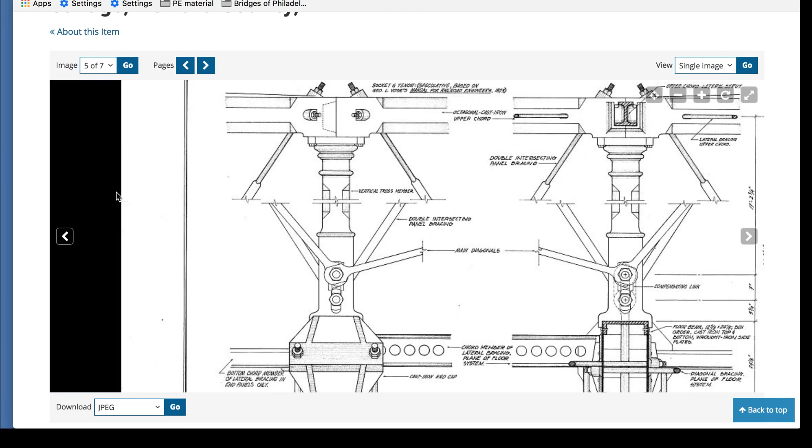So now, there are only 7 images, and this is a National Historical Bridge, and it's the only one existing in the world, an iron steel bridge, suspension bridge. So it's a pretty unique structure to look at.

And now they use cables instead of iron, and of course the cables elongate. This is a 150-year-old bridge standing with no issues. Now they replace cables all the time, as we know.

But this sort of reminds me of the bridge in Philadelphia with the pin design, etc. And this bridge came before the bridge in Philadelphia. This is 1869. Our bridge in Philly is 1895, I believe.

Let me bounce over one more. Yeah, 1869. And again, this guy was self-taught. He was born, I think, 1814. He was like 54 years old when this bridge was built.

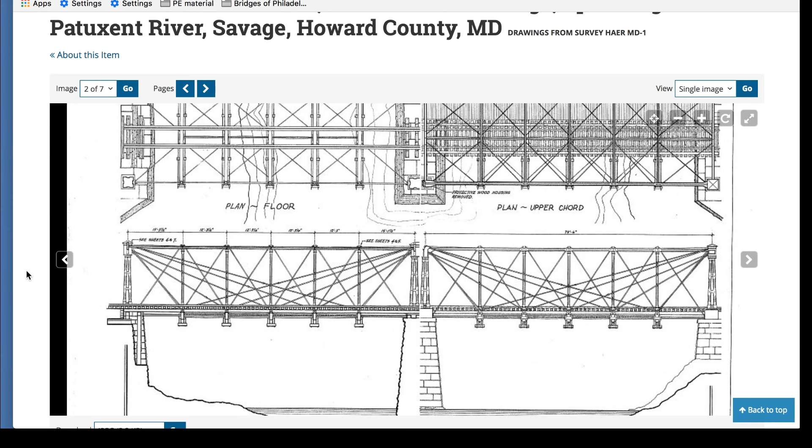And he was a carpenter. I'm saying, how awesome is that? And his bridge, they built over 100 of these because it was awesome.

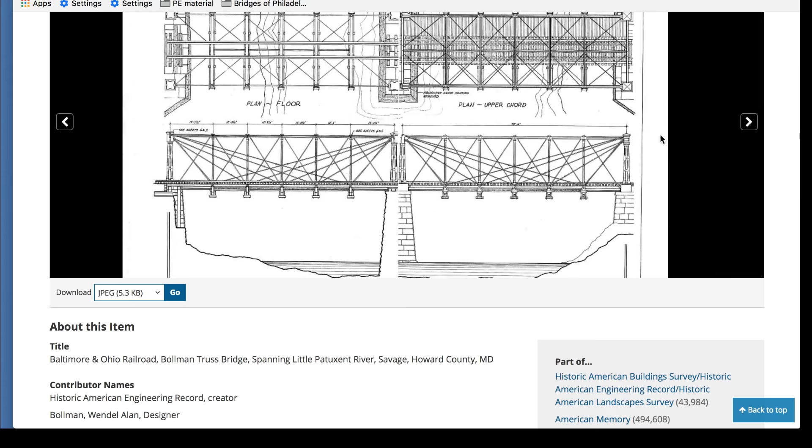Now, looking at this design, this is the bridge span, and they use the... let me see if I can get this out. Come this way, scroll. I'm going to show you the bottom of the page.

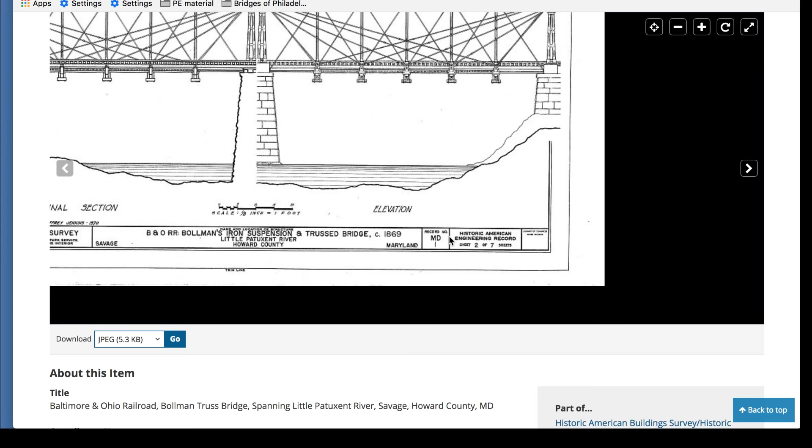Historical engineering record. This is, you know, they used a real survey of this, which is kind of cool to actually have online. This is the Library of Congress that has it. They only have 7 pages.

So it's up to you to figure out load paths. No engineer usually would like to try to take this on, because if you're wrong, it's forever in the record that you screwed up. So when I say it, I'm just theorizing load paths, but it's a truss bridge.

Don't, if you look at this one or whichever one helps your eyes, but kind of like looking at this one, they're two separate bridges. But look how this load is transferred to this column, and then all of these, 1, 2, 3, 5 of them, then it's transferred to this column.

Now don't leave out these members here coming down, here and here, all of it helping to level this deck and transfer the loads down these 2 columns, which they refer to, looking at my notes, as vertical post.

So here are the vertical posts, and as we see, if you got rid of the top chord, this load would want this top vertical column to fall inwards, 79 feet 6 inches it appears. But this top chord then becomes in compression, so it keeps the distance of these 2 apart. And yet, look at the scale of it.

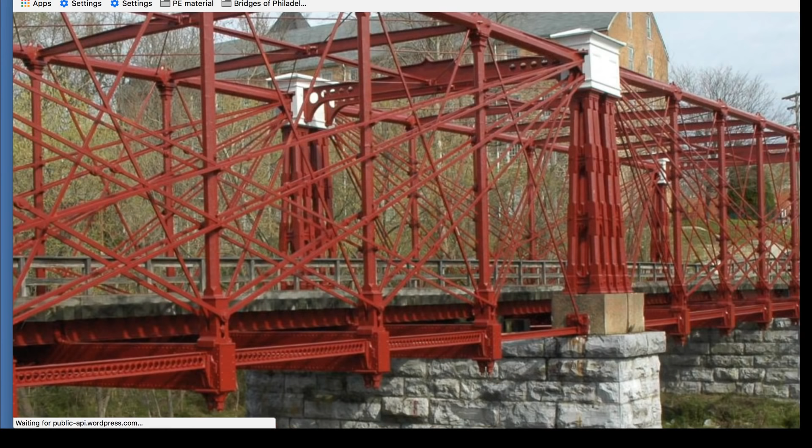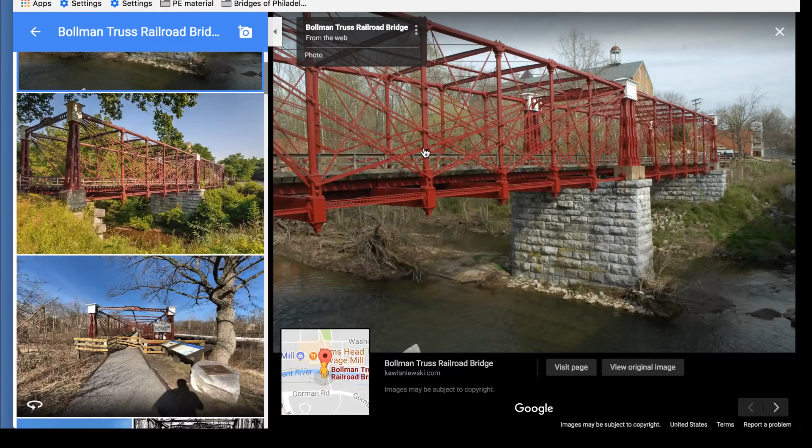Give me a second, okay here we go. So looking at, I did it again. When I touched on the image, it bounced over one. Huh. Oh, I got it. It's magnified, and so when I touch on it, it gets some other signal, I guess. All right, great, awesome, I don't really mean awesome.

So here it is here. And if we zoom in, if it allows me to zoom in now, here we go.

So these guys across are keeping them from coming, they're the struts, keeping these 2 from folding in, obviously. And now we've got this little small scale of this.

Beautiful, and here's your supporting column, which they call the verticals, and those are your end verticals. Looking at my notes here, make sure I get everything right. Yep, they still call this a portal strut, so it's an end portal strut, and these are your regular struts.

Awesome, and then here are these members here. Now here it is hanging here. Take note of, let's see if I can pull that down. Yeah good, take note of the last one. Look how small the scale is.

Isn't it amazing? And they offset it, it's lowered a little bit. No big deal, I mean obviously it lasts 150 years. Remember, this guy taught himself, so no one taught him this. He taught himself, and it's so solid that he got a patent on it.

They did 100 bridges, and people were following his design around the world until they went to cables, etc., and changed over. But it's very simple and prefab, mixing metals, cast iron and wrought iron.

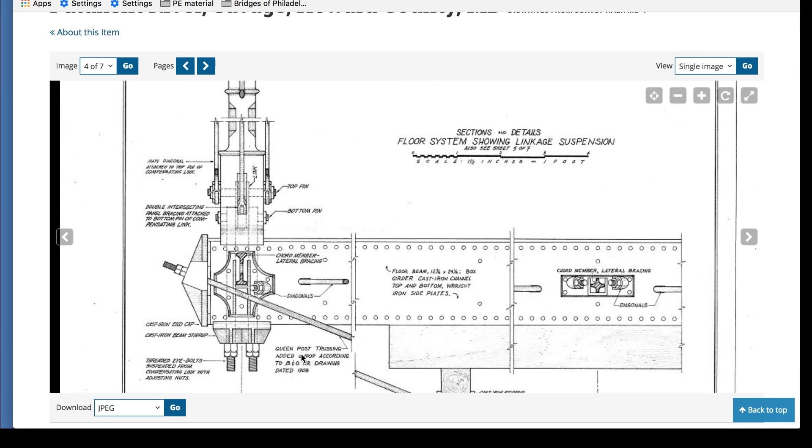Floor system showing linkage suspension. Okay, yeah, we're going to follow all that tomorrow. Here's your eye bolts and your queen post. Let's see what we got here, let me see if I can move around in this image.

Cast iron stirrup again, and then this is left out for whatever reason, but it looks like a wood detail to me. I don't think it has wood in the current image.

And it's open for foot traffic, so this is what it's going to look like. There's the plaque, and there's our uprights, and there's two structures, sister structures behind each other. They didn't do anything to tie them in, I don't think they had to. Obviously they stand alone, they've stood 150 years of weather and beating, etc.

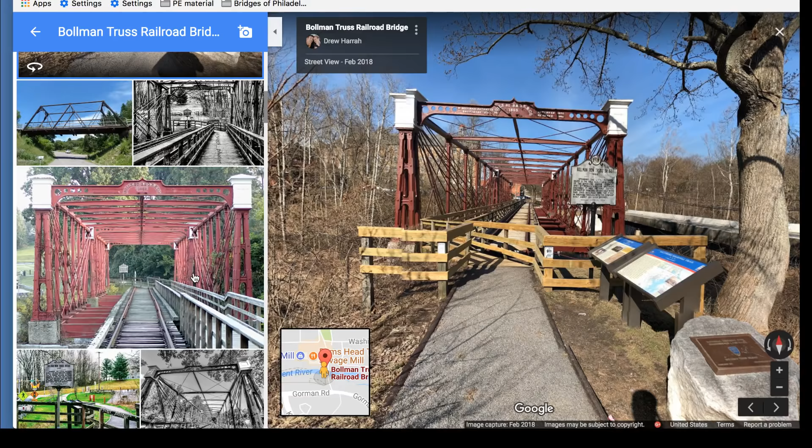There's some people having fun with it, I think I might have some fun with that too. There's a top view, I'm trying to think if I can get you guys something else. I've looked at all the typical images that I could find.

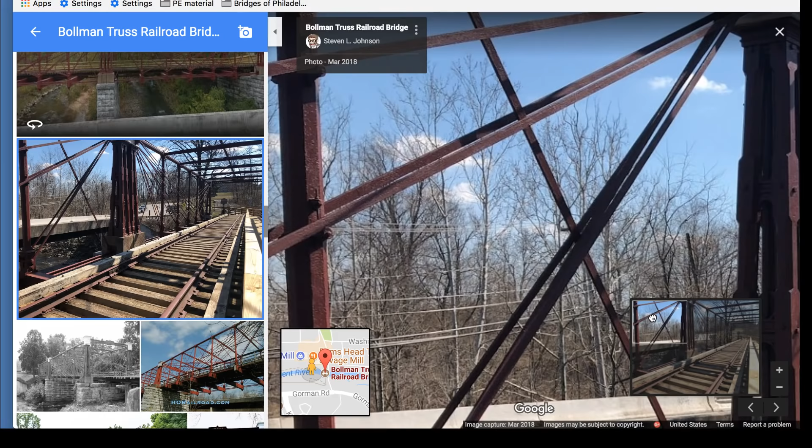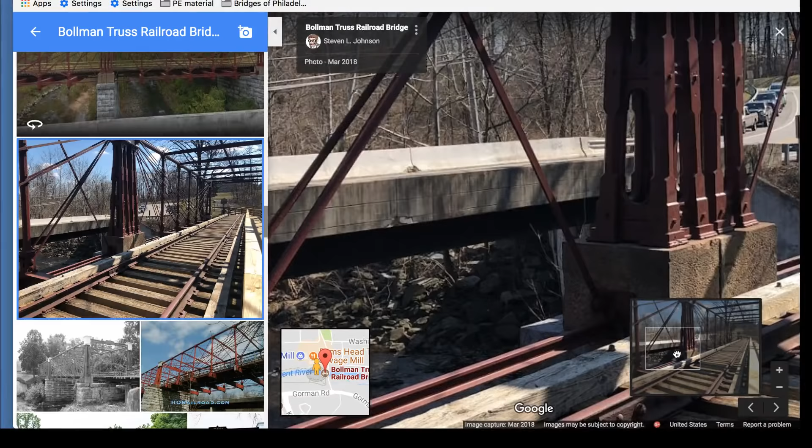There we go, let's see if I can zoom in and get you this linkage. So this linkage is what I want to see, using this. This is the adjustable bolt, you tighten it up and it would elevate this, obviously putting more tension on the bottom of the deck, elevating it.

So if you would imagine that one, if I could follow it up. Now that's the first one, so there was no adjustment there. So the second one out, going over to the second member, you would adjust it, and it could elevate the bridge ever so much.

Let's see if I can find one down here. So here it is, with my mouse. This would adjust up, pulling tension here, leveling the deck, creating a hinge. All this being able to hinge, which is amazing, crowning the top or leveling the top, however that would resolve itself.

Going back to this, we zoom in, let me zoom in. See detail sheet 4 and 5. Right, we saw that on the unit with the bracing. This one they're not sharing.

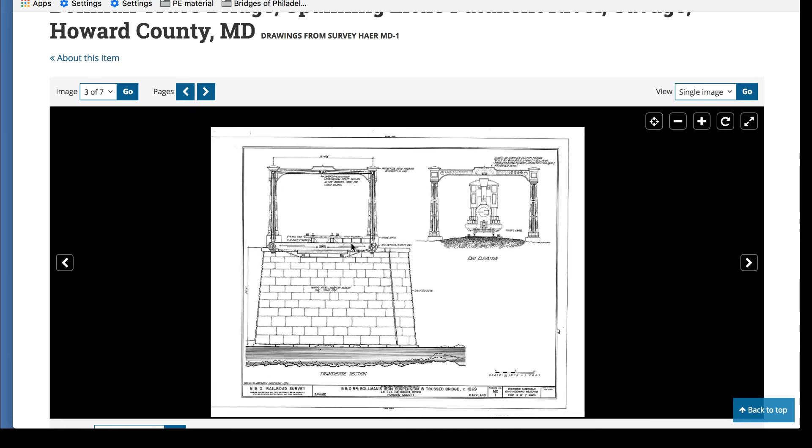Wood walkway, that would have been a wood walkway back then, probably current day too. And it's hard to read this stuff, can't read the top. Longitudinal strut, upper chord, same for floor beam. Okay, so I don't know what they mean by same for floor beam, because that's obviously a different detail than floor beam.

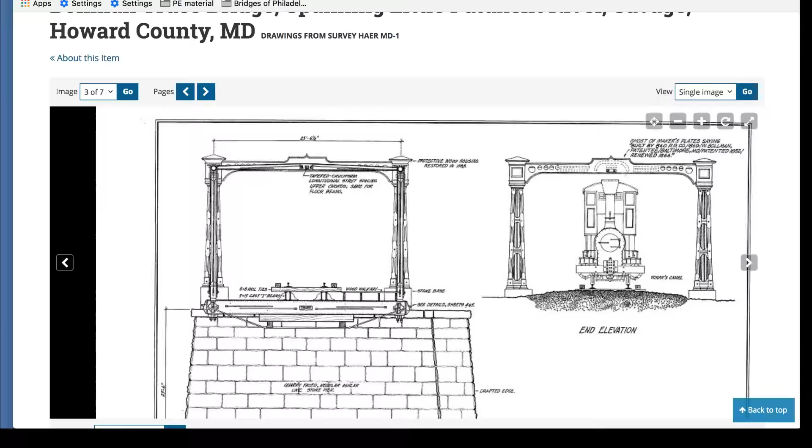Same for floor beams, floor beams are substantially larger, and so floor beams are here. These are the floor beams, which they're saying. Let me zoom out, and that's the top strut.

Floor beams obviously designed to take a load, and that's designed to keep the bridge from folding inwards. Apparently, remember, the person who designed the bridge is dead, and there we go there.

And moving on, we have back to my drawings here, so we're at page 2, and there's your two spans, 1 and 2, and it's just beautiful. It's just beautiful, this suspension bridge, iron suspension bridge.

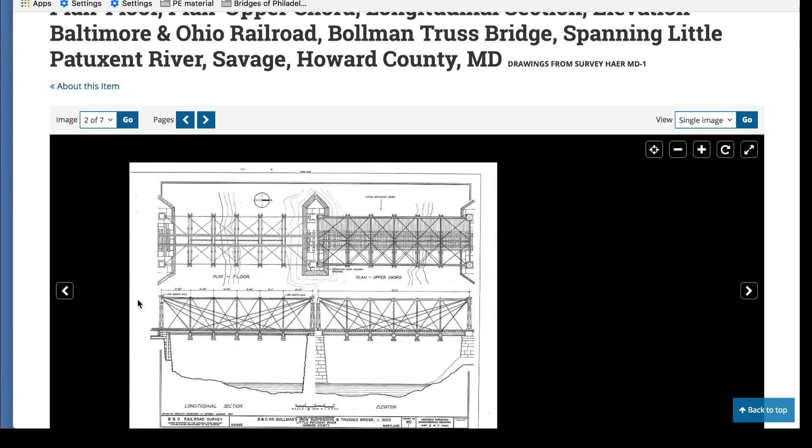I find that awesome, and this bridge was moved to this location. It keeps moving, oh, the river below it. And moving over to one more.

Baltimore and Ohio Railroad, Bollman's Iron Suspension and Trussed Bridge. All right, so here's the Truss Bridge, circa 1869.

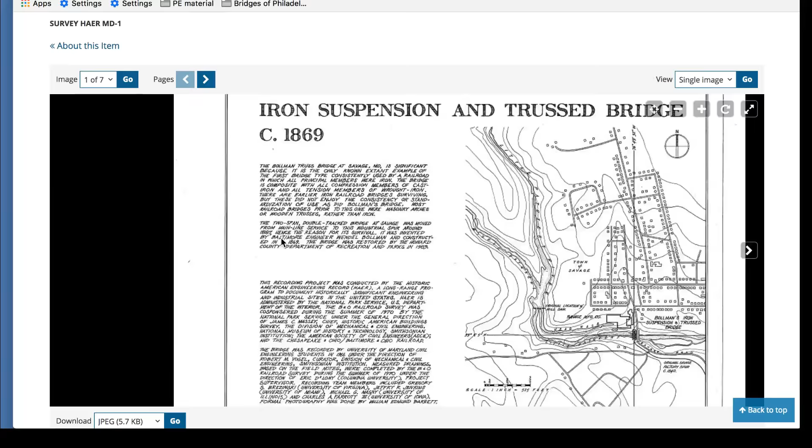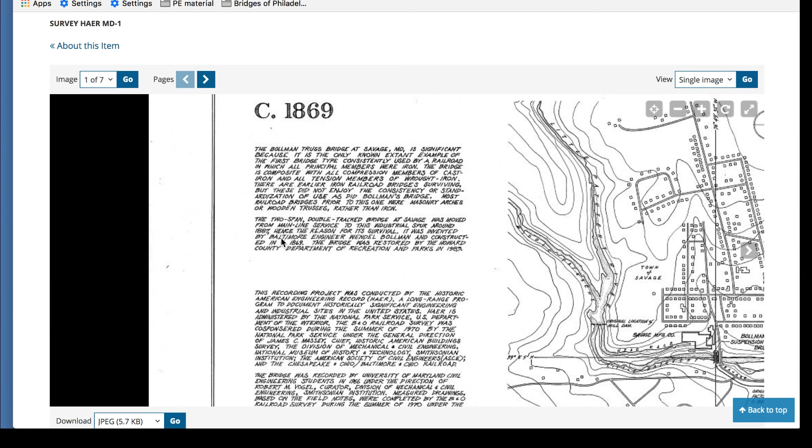Let's read the details on this real quick. The Bollman Bridge at Savage, Maryland is significant - it's called Savage rather than Salvage - because it is the only known existing example of the first bridge type consistently used by a railroad. So this was the first bridge they made, and is still the only existing bridge in the world of this design. So this is the one-off, the one-off in the beginning that then became 99 plus. This is the one that survived, which is amazing, right?

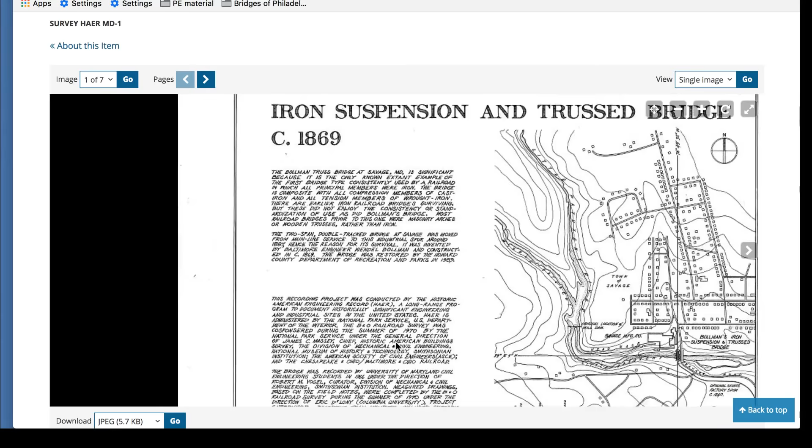And it's the Historical Society, Engineering Historical Society. Let me scroll over and see what we got here. The Bollman is a two-span truss resting on granite abutments at each end. I'm going to show you the combination - if you look here, wrought iron and cast iron. It's just beautiful, the combination this person used of the different metals. And this shows, 150 years later, we're going to see the real detail of it up close. 150 years later, this is still going strong. I find it amazing. Find it truly amazing.

Let me scroll over a couple more tabs. And this is someone else - American Society of Civil Engineers nailed it as the first civil engineering historical product, and it was the first. This was the first of the label, being labeled the first of their engineering feats. It's #1, so we'll see that too. So it's #1 in quite a few things, and it's still lasting.

Let me bounce over one. So I did some more research trying to find other Bollman trusses. Of course, if it's the only one existing, I won't find another existing one. But I found photographs under bridgehunter.com. It's got 2 images or paintings, I'm not sure what they are, but look at it.

There it is, the truss design, and how simple. And there it is again, and that's the skewed - rather, not offset. Skewed - no, it's not skewed. Those are parallel, just the last couple of members are skewed. So I would think of that as like a skewed vertical post, end vertical post. Let me think about that. So the load - no, I would call the entire bridge skewed. Correction on that, because that's the vertical post, that's the vertical post. Thinking of this guy's design, and all of the structures coming down to their suspension. So skewed suspension bridge, all iron. It's just beautiful.

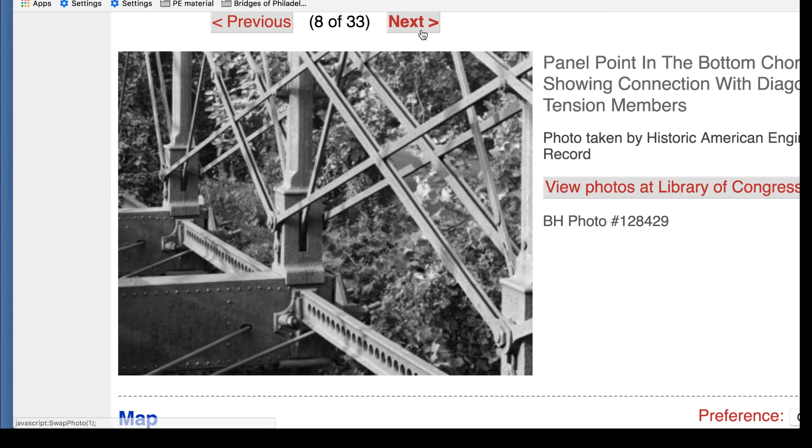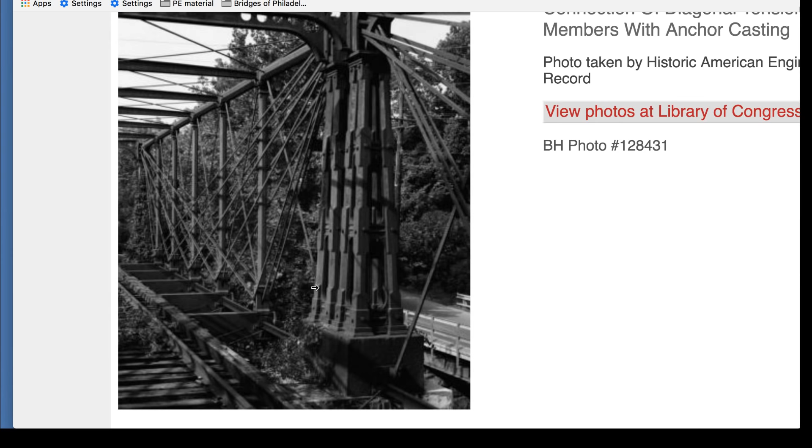I can't think of another word right now. I do have a few in my small brain, but nothing's coming up to mind right now. Actually, a lot of things are coming to mind. I just can't make it stick, can't voice it. Now, I guess I should have checked to make sure you guys can hear me.

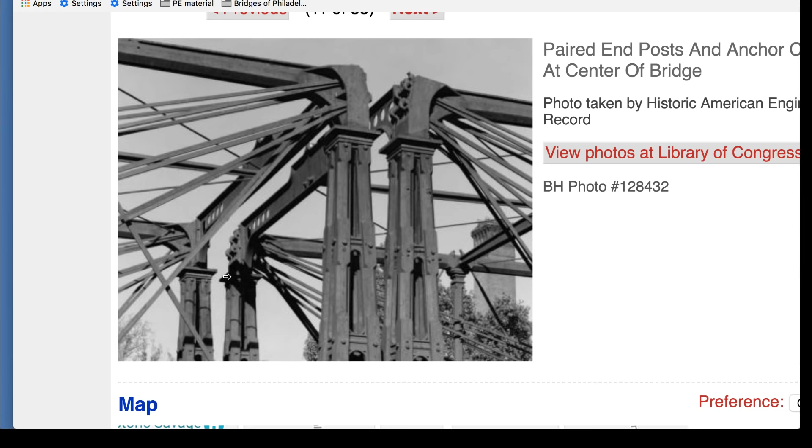And as you can see, no connection. No connections, no connection here. Huh, interesting to see if these are parallel or not. No one's going to adjust this bridge now.

That's not needed, but again, here's your slide going up and down, and there's your adjustment. I think it has multiple adjustments for each one - adjustment, adjustment, adjustment, each one. So this one, if you follow it down, has another adjustment here, and another adjustment there, which simply would be adjusting the furthest one out. So the loads do come back down onto this one, which then transfers back through this member here. So you can imagine this top adjustment, as it puts the load back down through, and a shearing point also on that adjustment. It puts the load back down through this upright vertical, which then transfers it back to its bottom load member.

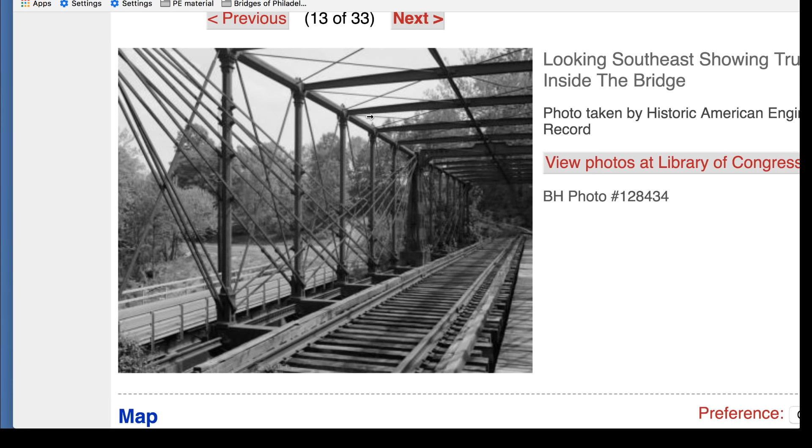Interesting. If you follow that load path, this one transfers down to there, this one transfers down to there, it has to transfer it all the way down, each one sharing the loads down. This one would have the most load on it then, right, out of all of these members. I'd like to see tomorrow if this member is thicker than this one. Did they progressively get smaller, or did they just size them all the same?

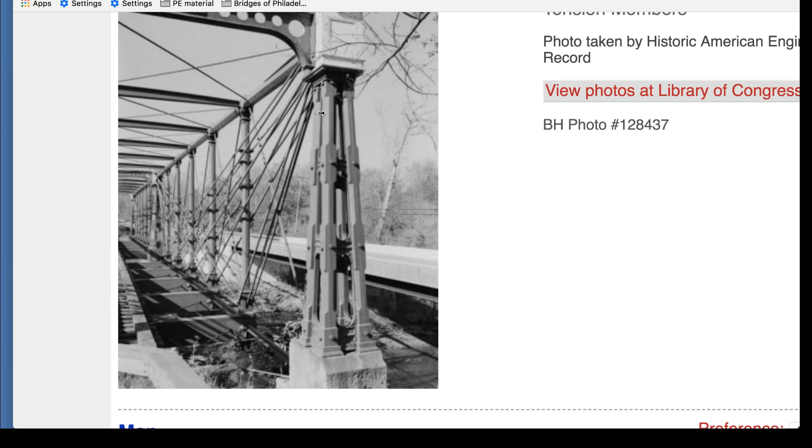Wow, it's just beautiful. I'm evaluating stuff I'm going to be looking at tomorrow. Look how they have all the holes in it, for casting I guess. Huh, it's just beautiful.

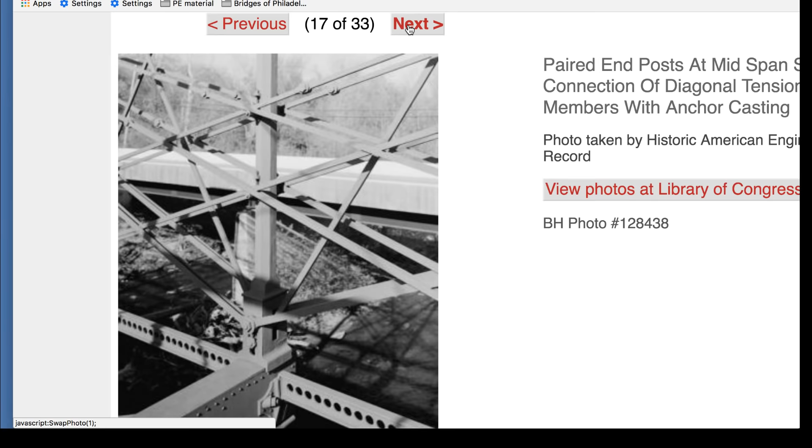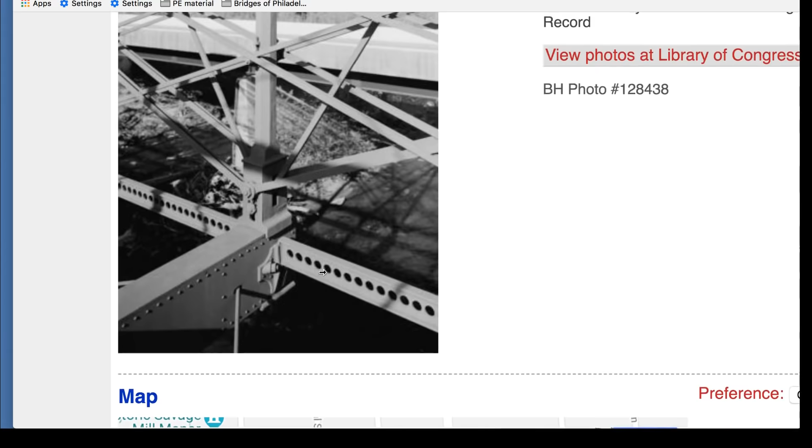Okay, yeah, I'm really interested in that detail there. And I want to see rust. I don't see much rust here. I do see where, in the images I keep looking for, I did find it where it's on one of the piers. I'm going to be looking into that.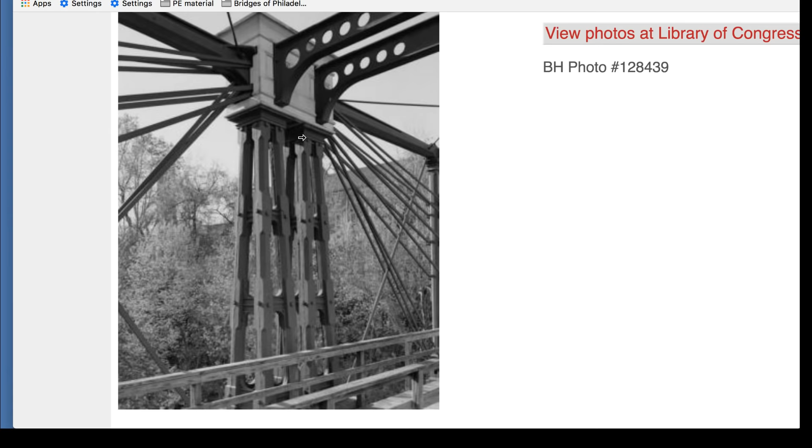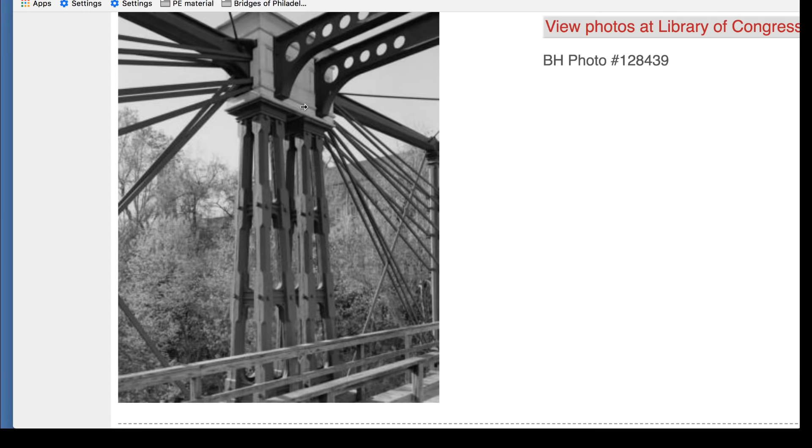This looks connected, right? This is confusing to me. This is where the two structures meet, and yet I saw images where it was not connected. Huh, I'll have to look at that. That's the walkway side. I'll keep that in mind.

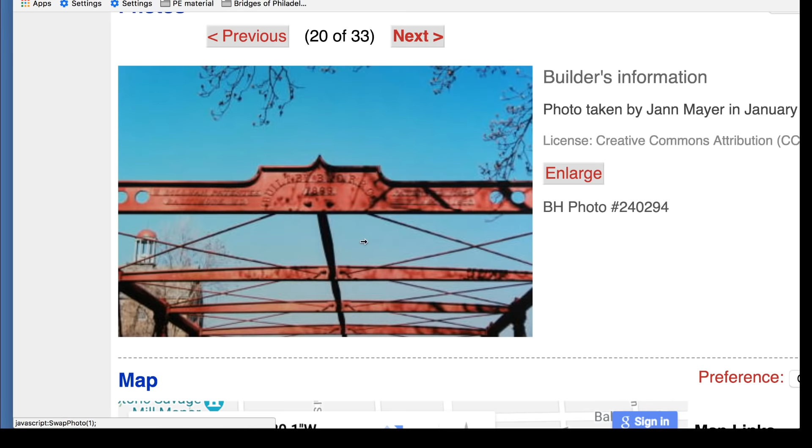I'm going to take my laser along so I'll get heights and widths, whatever. Huh, that one's interesting. I'm going to have to look at that.

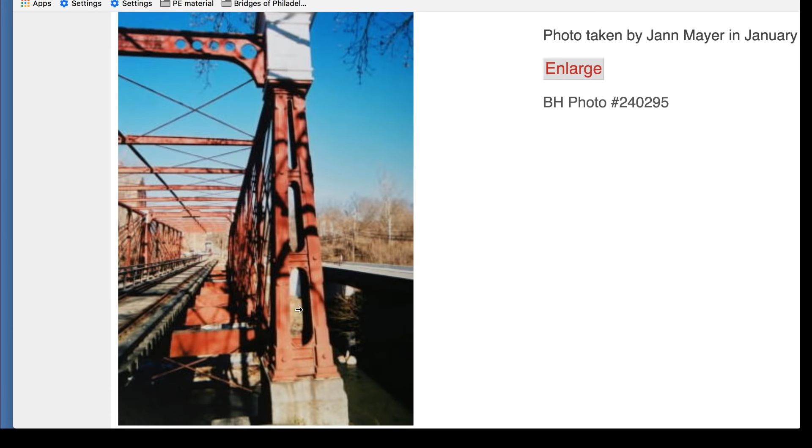And what are these? One, two, three, just ports. Okay, my eye lost it there. Clearly see it, it's sky. It's sky. Now these are tapered, I did notice that they are tapered in design.

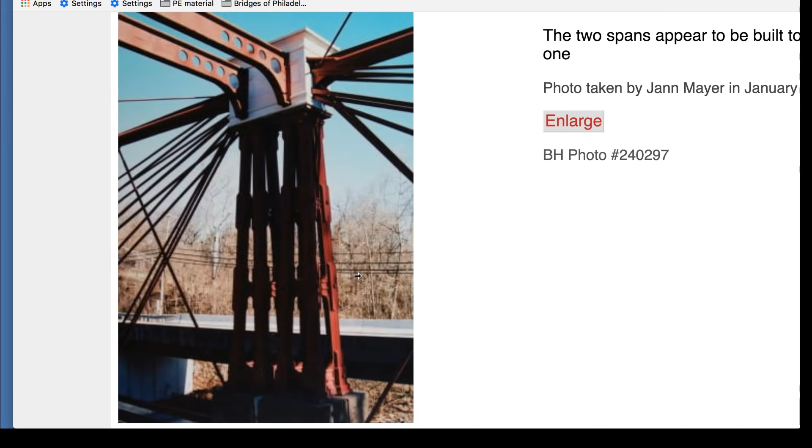Interesting, this is supposed to be granite from what I've discovered. It's just loaded granite. But ultimately this bridge doesn't need too much of an abutment, because all the loads are just, it's not pulling from the ground. This is like a free, if you could lift this it would be an ABC bridge. You could lift this bridge up and move it somewhere.

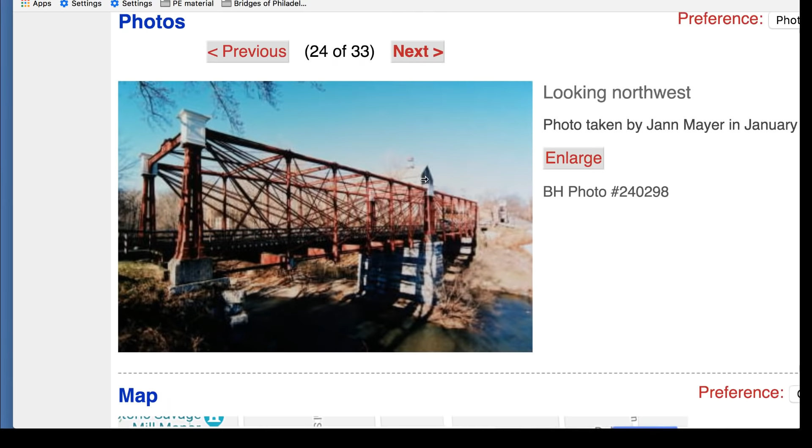So look at this thing again. It's like a cable stay bridge, but if you think of it that way, these are wrought irons. But number one, this guy is amazing. Let me show you why I find this guy so amazing. Remember, he followed.

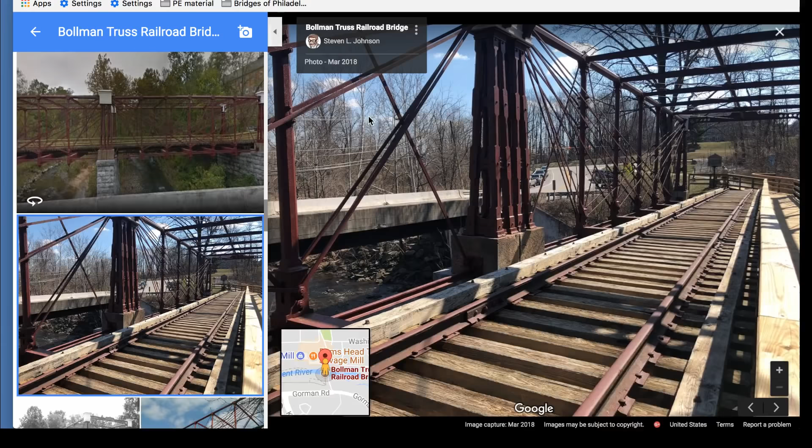Come on, where'd you go? Backing up. Backing up.

Bollman. Okay, yeah, you guys got to load that app, oh you're going to be so addictive. Try to get 3 nuts and what it amounts to. Yeah, there's some other research I'm doing for you guys on the bridges.

So load this app up on your cell phone, it's called Truss Me, it'll aggravate you now. They do have a little quick video to help you play with it. And ultimately you want to get 3 nuts, 3 nuts to do it. Keep in mind, try to think of a Warren truss, like a W, when you do it. Try to have some fun, like an arch. Try to think of a Pratt truss. So Google, I guess I didn't get to that yet. I wanted to show you this guys, and also do Pratt at the same time, so you guys can play with it.

I wanted to show you that. But just play with that, and we'll get back to the truss thing.

Now, I haven't gotten... I've gotten 3 nuts on it. Maybe I got 5 bridges with 3 nuts. I'm like, really? I keep changing the design, trying to get the ultimate 3 nuts. It's funny to say that, but when you play with this, it's gonna eat some hours up. It's a lot of fun. I've turned on a few of my engineer friends too, and they're pissed at me for turning them on to it. It's quite a challenge and quite a lot of fun.

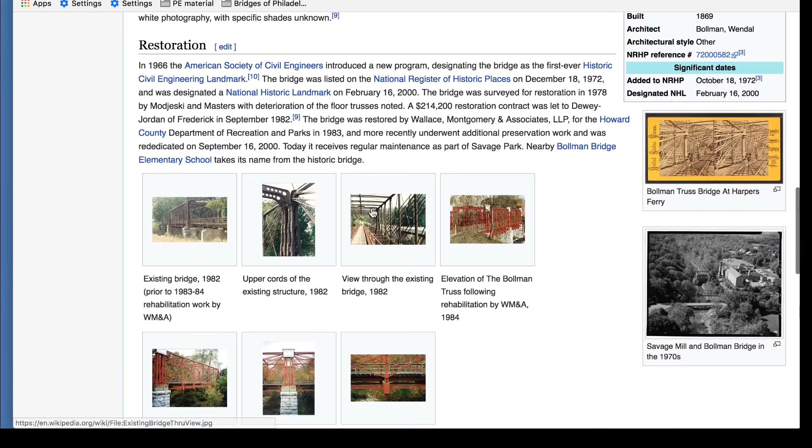So here again is the structure, the real deal. This is the real deal because there's no color, this is pre-repaired. How do you know that? Because it's painted now. So this is what it looked like bare metal, which is awesome that they loaded it up, because now you can see it without the pollution of the photographs of the paint or oxide.

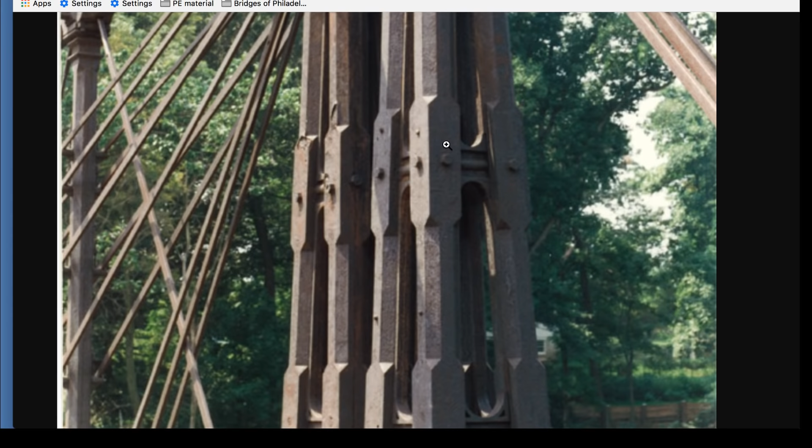Awesome, and these are dummy nuts, from what, a dummy, they call them dummy nuts. And it's funny that they call them dummy bolts or dummy nuts. And yet this is pop riveted.

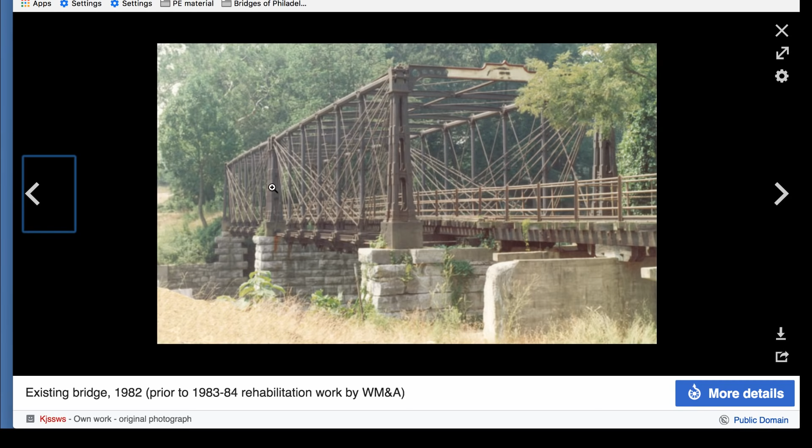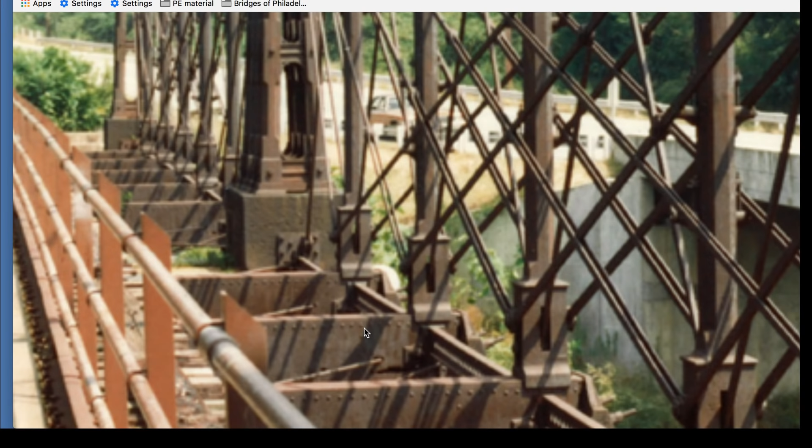No, I'm getting my bridges mixed up. Wait a minute, I'm doing something wrong here. It just hit me on something on the pop rivet thing. Come on... where are you? Great. It just hit me on something, oh this is awesome, on the pop rivet thing, hold on. Right there. Pop rivets, apparently pop rivets. Gotta make sure the pop rivets are there tomorrow. Yeah, I can't imagine them being bolts.

It's the same as the Philly Bridge, right? And so there it is, pre-paint. Looks pretty damn good. So I guess that 200 grand went to painting, because I don't see anything significant.

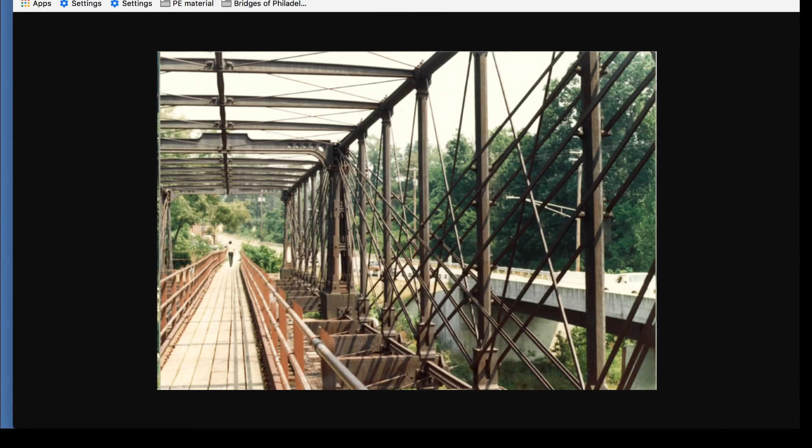I'm trying to get this thing to zoom. Great.

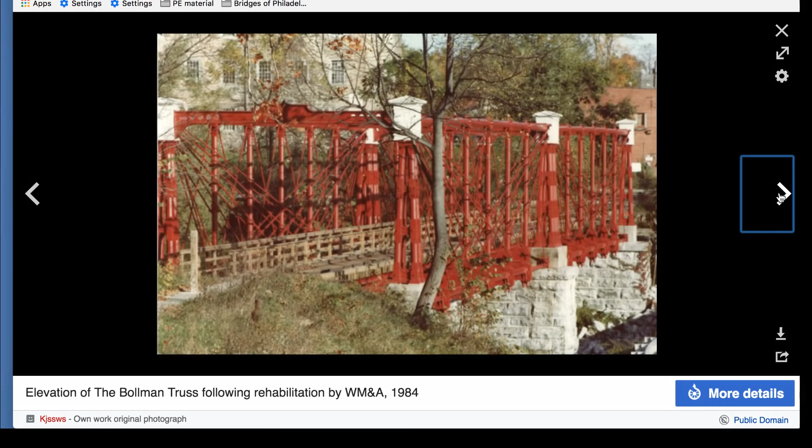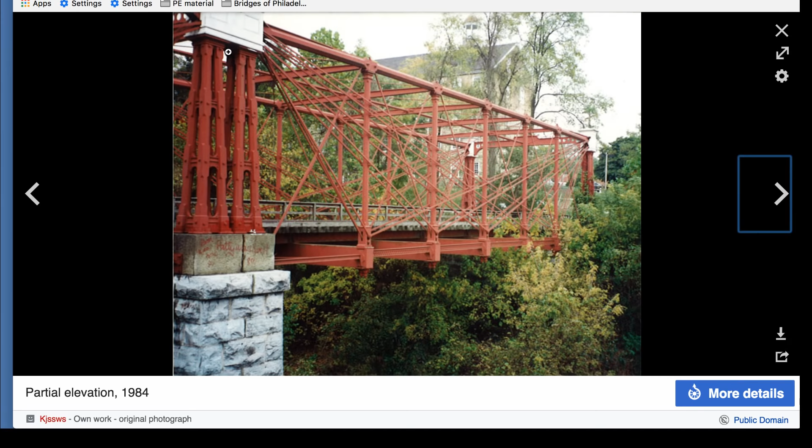There it is, painted. So my guess is most of that money was blown on the oxide, the coating. Oh, this is going to be pretty. So there it is where the two meet. I know I showed you a photograph where the two were not meeting up top, the decorative piece, if you will.

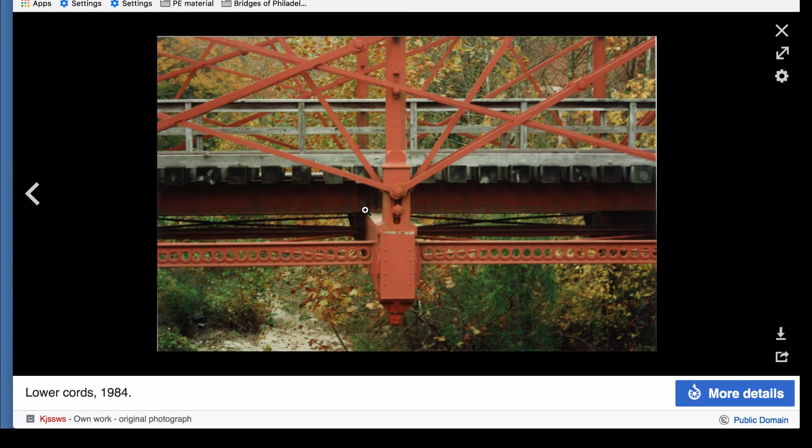They're clearly meeting. Well, they don't call me crazy for nothing. Okay, so that's pre-paint, it appears to be pre-paint also, or well, pre-paint then paint it again. Let's move on from there.

Again, these are the adjustable rods, adjustable pins. Wish they had more details on the adjustable pins.

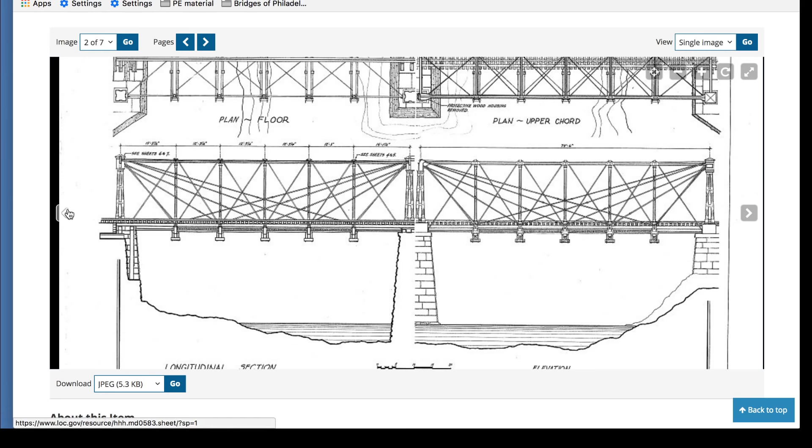This guy just sat there playing around, and he came up with this whole thing. Just amazing, a carpenter, born in 1814, and then they followed him. And last image coming up. Oh, we already did the last image. And I'll load you the links.

Okay, completed 1852. Yep, curated the 1850s. The age of intuitive design had been dead for a decade or longer.

So he died in 1884, so now they've started following the true deal. Here he is, a self-educated engineer, so they call him a self-educated engineer. He was a carpenter, and I guess it's sort of like you're taking away his... by calling him engineer now. I feel like you're taking away the guy's master brain, because now you're making him equal with people that had to go to school, etc. This guy did it without the schooling. So I think this is taken away from the guy.

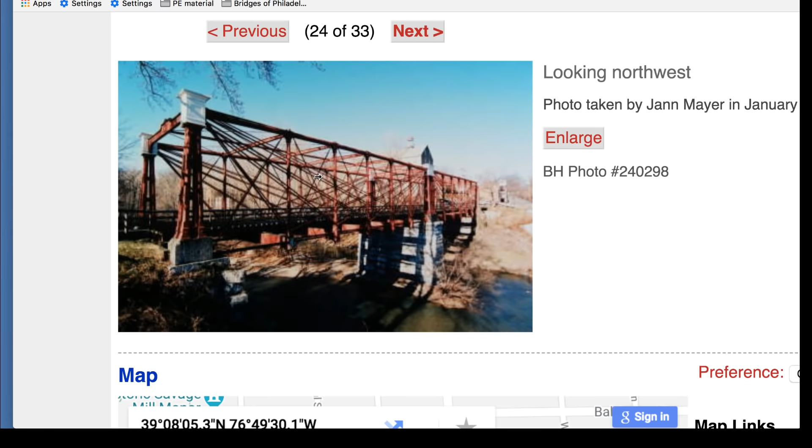A self-educated carpenter, who made bridges that engineers followed. This is what I find amazing. More than 100 Bollman truss bridges were built between 1850... because this is crazy, I mean not crazy. Also Thomas Jefferson was another self-educated architect/engineer, some of his formulas we still follow today.

And let's run through these images. Wow.

Here it is. I understand this part might have been made up, because someone stole the portal bracing on that, or they liberated it. You can say stealing if you want, but I think they liberated it. There it is, the National Park signage.

Here it is again. These are the adjustments we're going to look at tomorrow. They just crank up, putting that under shear forces. Yet it lasts 150 years. Shear force, sharing, S-H-A-R, sharing all of the load on each one of these.

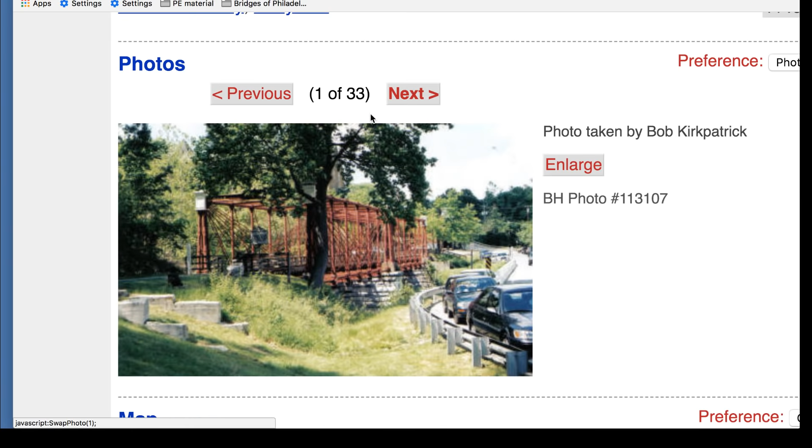It's just awesome. I don't quite get the intent of this - these two braces here, these braces here, and here coming up. I would think they'd want to buckle if they're solid and you started cranking up on this, shortening it. I think these would want to buckle if they don't have the ability to shrink, to adjust. So I don't understand that one, but I will tomorrow, I think. That'll be a big quest for me.

All right, what we got here? Sliding over one more time - quickly and inexpensively while providing the long-lasting qualities associated with metal.

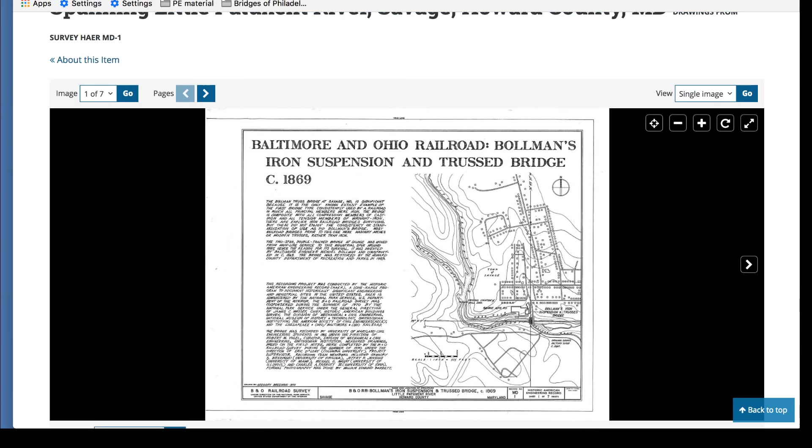Yep, so here we go. We're back to steel being awesome. Steel's always awesome, and everybody hates on steel. Yes, it takes longer to get it, etc. Well, you got a 150-year bridge that everyone can be happy with.

Right there, they're not connected. So I knew I wasn't that crazy - they're not connected. So they added that piece there, this decorative bracket between the two of them. This is interesting, this piece, these caps. I'll look at them to try to figure out whether they added them or they were always there.

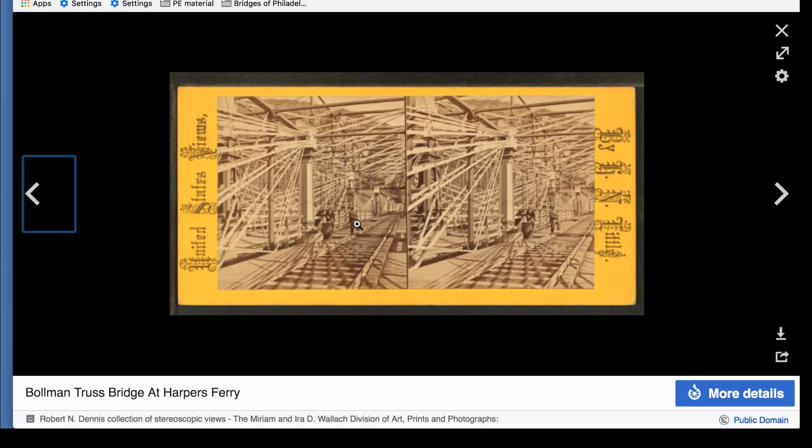I would. Oh okay, I got it. Photograph - well, you need a dual span. The photographs they had, I'd be able to see a dual span. It's not there either. What we got here? If I could read that. Oh, United States views, whatever that is. That looks like 1930s, right? 1919 or something, my man dressed up. Maybe even earlier. It's gonna be the best image forever, and that's clearly a cap.

Whoa, what's going on here? I feel like I'm in a different structure altogether. So this is a different structure altogether. Look, this appears to be another deck up here, or this is another Bollman design, another Bollman bridge, not this one, I don't think. Look how long it is - multiple sections as you go down this tube.

Interesting that it went up higher here on this detail. That's the duplicate. I'll have to give that - I'm looking for that other one. I said it was kind of odd to me. And there, I think this is it here. This one.

I'm going to look at that. Oh, it probably threads - probably threads on the bottom half. I wonder if it's a sacrificial piece to even tell them if it's starting to take loads or strains, so you can start seeing it elongate or show some failure. Because the guy was pretty smart to build this design, I wonder if he thought of that also.

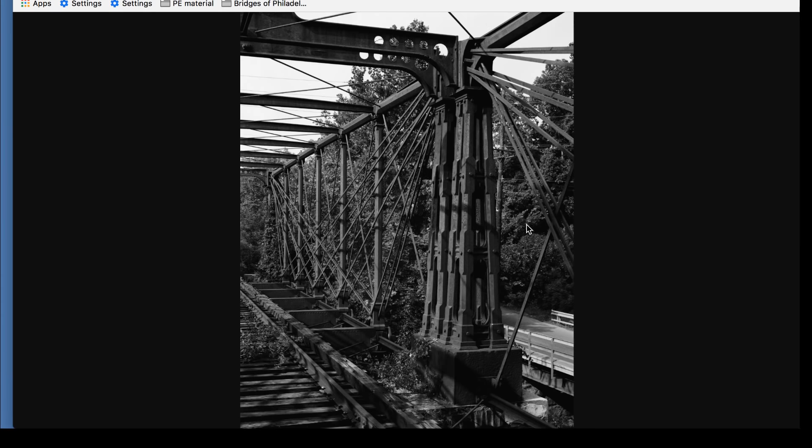And moving on. This piece here is what's got me - it's the same as this piece, I believe. So we got the debris on the tracks and all that. So this will be a good view of what's going on with the structure.

Pre-paint, you can see the cast iron, some nicks and chips. Oh, it's beautiful. And that's just solid material, so no water is going to penetrate it and cause freeze-thaw cycle issues. Just a beautiful structure, look at it. There's some little - I'll definitely take a look tomorrow to see if we can find things like this, or did they somehow patch it, which would be... I guess that would be fair play, but I don't know. It's just beautiful, and it's just a pin up here holding this together, and these are just bars.

Awesome. And there it is again, and that's the opposite version of it. 1, 2, 3, 4, 5 bays. And there's the cross bracing, lateral bracing.

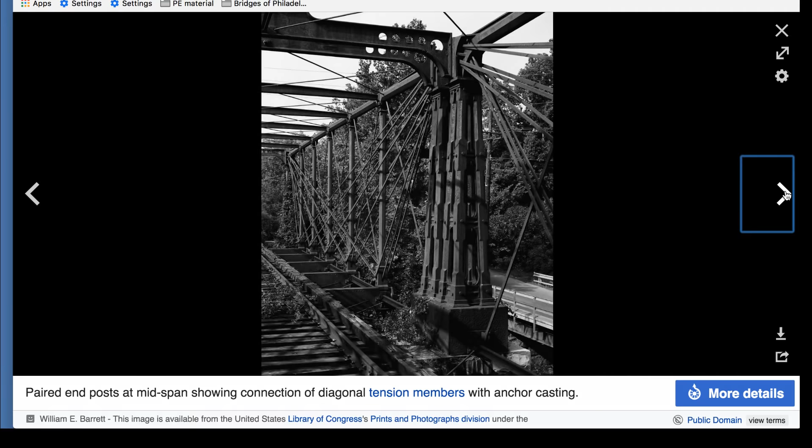Back out. I don't know what that is. I thought I was going to show something. And scrolling through here real quickly.

Not connected, no caps. Somebody's liberated a piece of material there. Half painted. 1983, okay, right below me. The 1982, prior to 1983-84 rehab work. That's awesome.

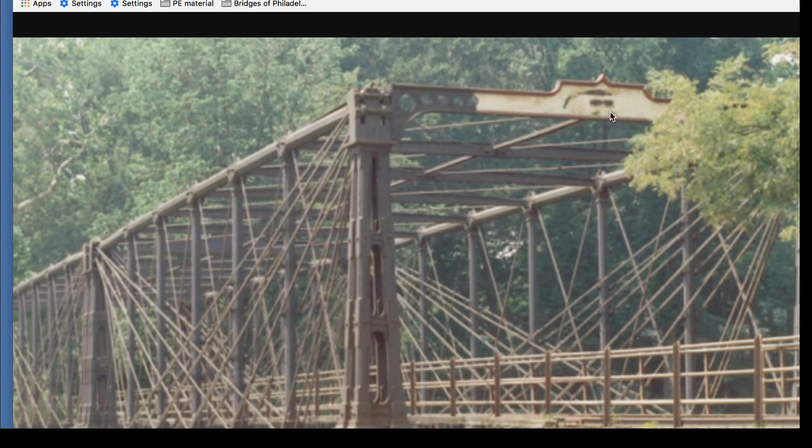So before the rehab work, I'm trying to see if we got rivets and all that stuff. So I have more images now. You can see that. There's the deck there for people to walk through. No, looks like mostly paint.

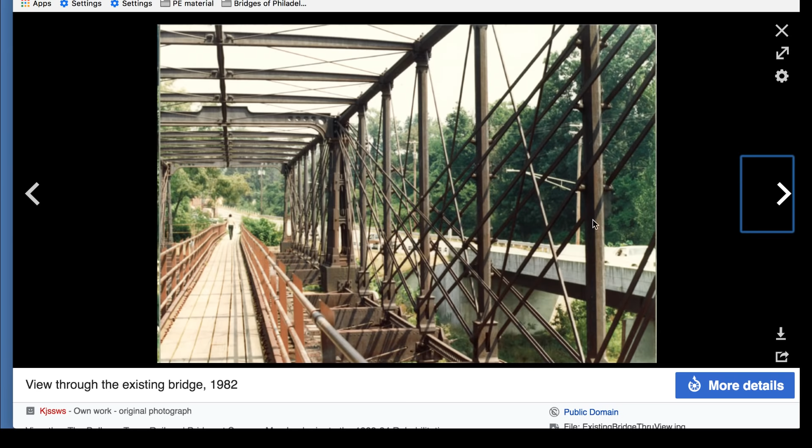$280,000 in paint. I'm okay with that. Back then, that was some good money, right? All right, let's see what else we got. Went through there. 1982, went through there.

What's up, Blind? Robert, the FIU engineering staff and students should make a field trip and look at this bridge. Yes, Robert. Yep. Yes, Robert, agreed.

So this connection here I find interesting because this would hold the whole bridge. This floor beam was being held on by - I want to see the connection. What's this floor beam being held on by? It's like a clamp. And it's held by the top, if you will, like you're reaching down and grabbing a basketball.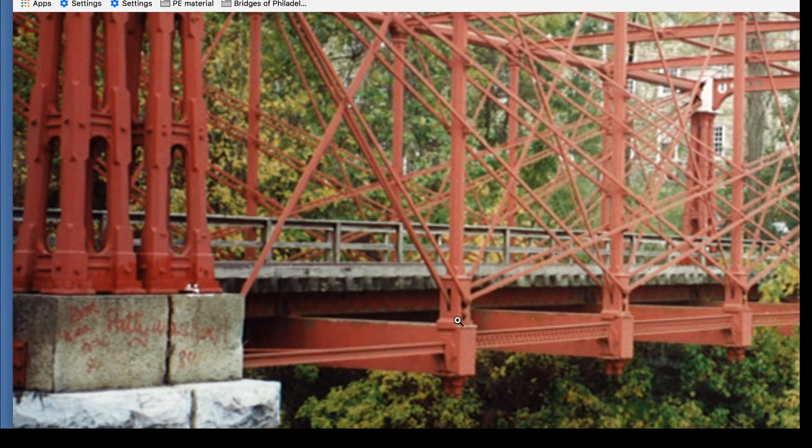I wonder why, I guess it keeps it stable. And here are your two bolts. We saw that in the photo 2 or 3 I showed you. The two bolts going through here. And so, yeah, that's just a sway, like keeping it locked in. I'm going to think nothing more of that.

And all your loads are in threaded bolted connection right there, 1 and 2. I don't see it going through the top here. So if you guys are ready for tomorrow when I do this, we'll look here, if you remind me, and see where they end up. They end up here. And then how's the connection made from here to there? Here's this rod coming down, this rod coming down, this one going through.

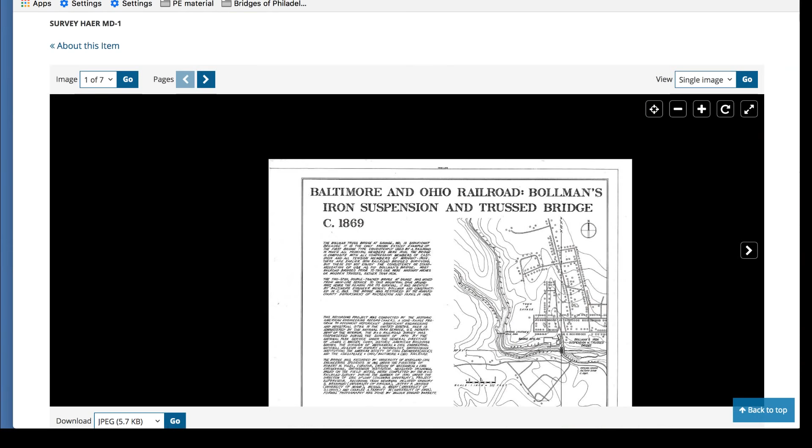Let's see if we can find that in there. Image 2, or is it - nope. So how was he, okay, there's a cutaway of it. Page 4, so going through there, there's that part that I was fascinated with. Can't tell anything here. Bottom pin. Top pin.

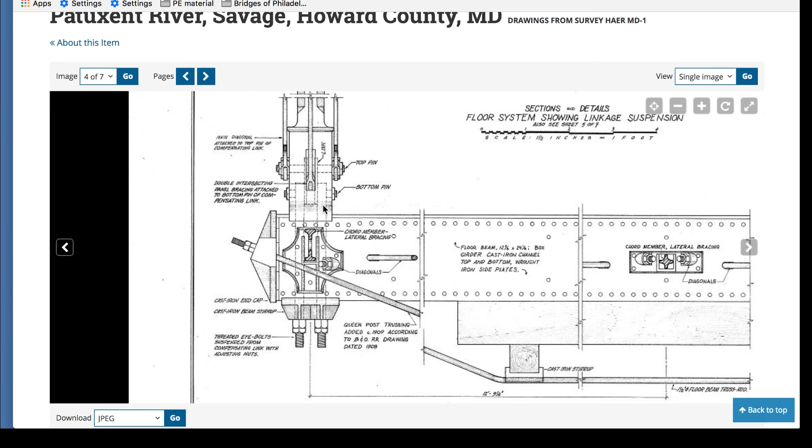Oh, great. Well, there's the top, that's for the chord. But I do see a through rod. This rod here, right? A single.

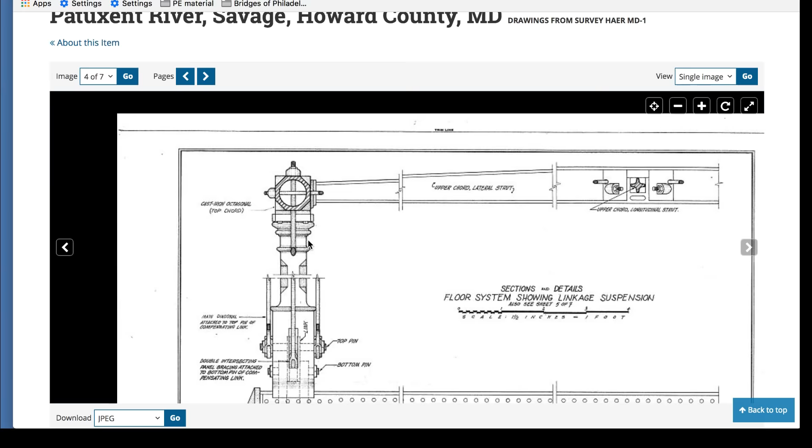Gotta bring my ladder, right? I don't think you think I'm joking. I might bring my ladder tomorrow. I don't forget, I've got a mobile ladder, small enough, 16 foot, I can see the top of it.

What do you got here? And note that there is a center column. What do you say? Center column. John, what are you talking about? And note there is a center column.

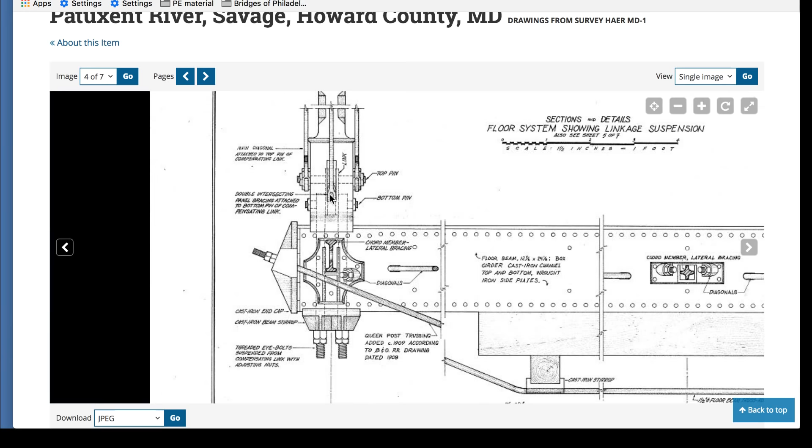This connection says link, this is for the cables, if you will. Bottom pin. Double intersecting panel bracing attached to bottom pin of compensating link. Compensating link, so this appears to be a link. Really, you're killing me here.

Let's bounce out. So in there, these pin, 2 pins, 1 and 2. Compensating link between here and here. Might be a link, looks like this, perhaps. Literally like a bicycle link.

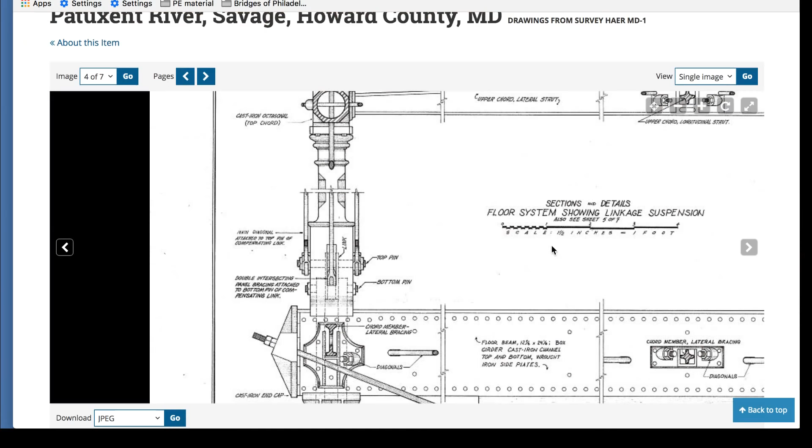But you got 2 rods. Huh. Turned in that plane. All right, let's see if we can get another close-up of that. Let's bounce on, take a drone. Yeah, they got a drone image of it. Take a drone - I do have a drone, but then you guys will never see the image.

And I got to play with my drone. Next thing you know, be playing with myself all day. Get it? All right, here's that view. I do have a drone though, but sometimes they don't allow it in parks, right? I don't even know what the rules are anymore. Can't fly over people.

Everything else - here's the linkage again, compensating link. Okay, so there's the bottom link. So this comes in, ties here. This link ties to there. Okay, so this transfers the load immediately.

This is just a standoff, if you will, at that point. So it transfers the load immediately from here to here. This is a truss plate, acting as a truss plate. And these are the cables, which in case of the solid bars.

I did a video about how I don't like DJI's products because I got hold of DJI. I did multiple videos, if you find it. They refused to let me fly their drone unless they give me access to your photographs, all your data on your phone. They just have access to it. And also, say you're flying over a structure you can't fly over, you agree to allow them to call the cops on you, basically. Not basically, you do, and they can send your data and all.

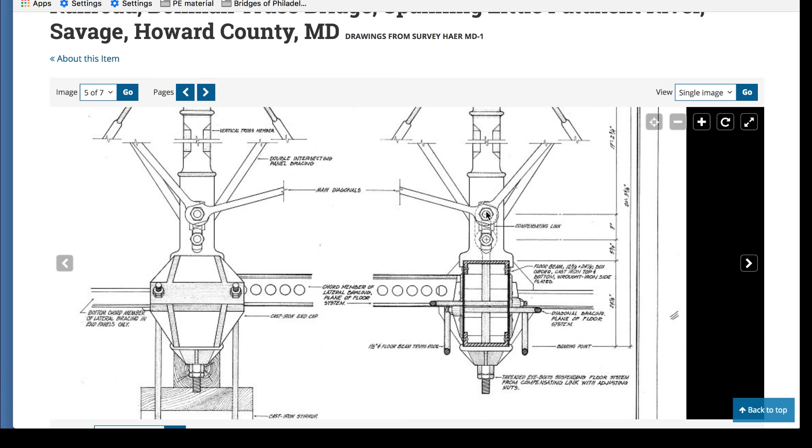I usually respect them, but clearly now they got laws - you can photograph what the hell you want to photograph, they couldn't stop you. But that was a few years ago that last happened to me. I don't need that violation, I don't need that drama rather. Yeah, I don't need that drama, I can't be bothered with that.

All right, so back to this. So here we got this pin. There's a threaded eye bolt suspension floor system, suspending the floor system from the compensating link. Yeah, there it is. Glad I did a good evaluation of that, at least per what they say. From the compensating link - oh, I feel good, I feel like patting myself on the back for that one.

Cast iron end cap. Bottom chord member of lateral bracing, end panels only. Okay, bottom chord member of lateral bracing, end panel only. So what they're saying there, I don't know why specifically, is what I keep pointing out - I find it's a little different, that he did it a little differently.

This right here, these are what they're referring to as panels. If you and I were going to dissect this, we'd take it from here to here - that would be our section we're dissecting, but nevertheless the Smithsonian engineers refer to this as panels. 1, 2, 3. And so this panel, they thought it was significant to mention or document that bottom chord member of lateral bracing in end panel only.

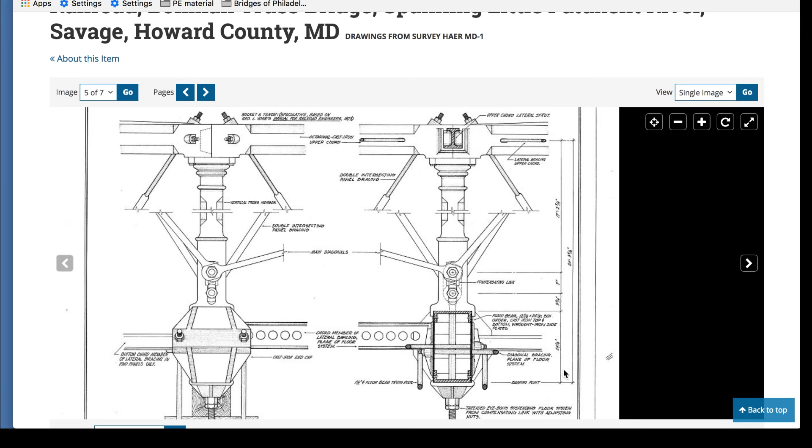Awesome, though - they do have measurements. 24, appears to be 2 feet from here to here. So that'd be, let's see. Yeah, that's nothing for me.

Floor beam - oh good, there's a cutaway of the floor beam. Floor beam, 12 5/8 by 24.5-inch box girder, cast iron top and bottom, and wrought iron side plates. Oh shit, so it's got a cast iron top and bottom, and wrought irons on the side plates. And they don't tell how they're secured. So this was prefabbed again - the whole unit, not rolled or put together. This is 4 pieces to make this floor beam.

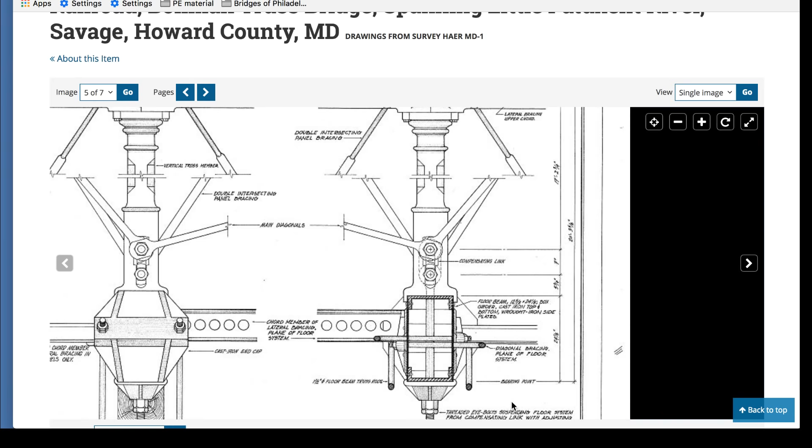Now here's a cross section, diagonal bracing, plane of floor system. Floor beam truss rods - I think that says truss rods. Okay, so that's going to resolve that there.